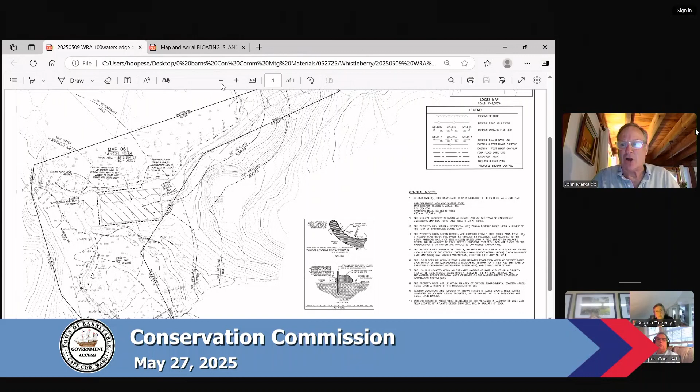So that's about all I have. If there are any questions, please let me know. Thank you, John. Any questions from the commissioner? Seeing none.

It's pretty straightforward on this project. Ed, do you have any comments on this one? No comments. Okay, Channel 18, any public comment on this? Seeing none.

Could I have a motion to approve this project as a negative determination? So moved. Second. Roll call. Abadili, aye. Foster, aye. Hearn, aye. Kashulik, aye. Lee, aye. Sampu, aye. And Tangney, aye. That's unanimous, Mr. Chair.

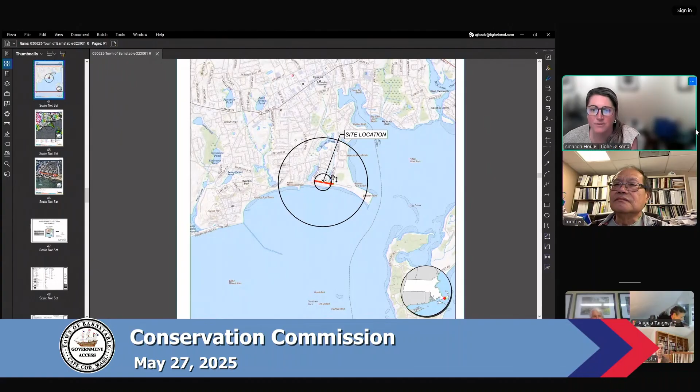The town is proposing to replace an existing failing culvert on Hawes Ave, as well as mill and repave a section of Hawes Ave. We're looking here on Kalmus Beach, situated between SD Ave and Ocean Street. I'll flip over to our ortho photograph here. The limit of work for the culvert replacement is here, in this area perpendicular to the roadway, and this section of Hawes Ave will also be milled and repaved. There's been quite a bit of patching and maintenance work in the roadway because several sections of the culvert are collapsing and failing. It's an old reinforced concrete pipe.

So we evaluated a number of alternatives: lining it, replacing it in its entirety. It outlets near where you see this label that says Kalmus Beach. In looking at the various alternatives, replacing the entirety would impact a greater extent of resource areas. So the project team opted to target the most deficient section, particularly the area underlying the roadway. It's going to be this inlet/outlet within the salt marsh here, and then down until about the midpoint in the culvert, where my mouse is panning.

The work will occur within salt marsh. This embayment up here is regulated as salt marsh within the existing roadway, as well as a section of coastal dune. I'd like to point out at the outset that we've applied for this under limited project status under 310 CMR 10.24 for maintenance and improvement of public roadways, as well as maintenance and repair of structures, including culverts, given the temporary impacts we're looking at in terms of salt marsh.

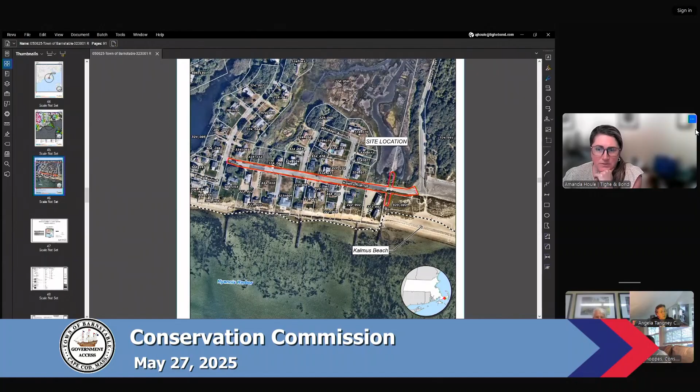We examined our limit of work and have tried to keep the trenching as narrow as possible. Instead of doing a trench with sloping sides, we're proposing a trench box to keep this as tight as possible, so we're minimizing the impact to the dune and to the salt marsh. And then I can pan to go to our plans here. Let me zoom out here.

So this is a better view of this now that you've seen the area. We're situated in coastal dune, with a fringe of salt marsh. We have our outlet here, our limit of work, and then the excavation around the culvert.

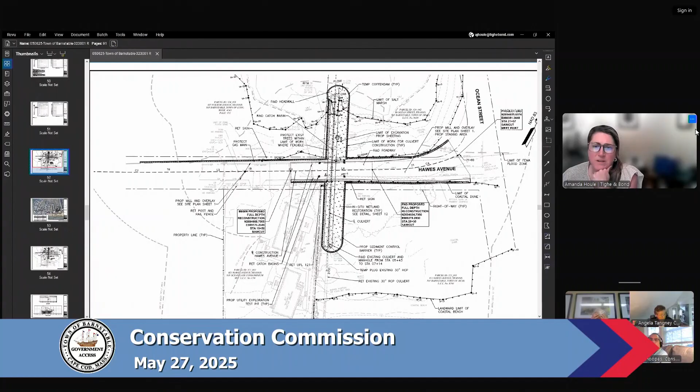We'll be installing timber matting on the outside of the sheet piling used to trench box the excavation, in order to minimize pressure and compaction of both the marsh and the coastal dune. Given the sensitivity of the resources we're working in, we're proposing to segregate and stockpile the dune sediment and soil separately. For the salt marsh that's excavated, we're looking to stockpile and maintain the peat and marsh platform, covering it or keeping it inundated with brackish or saline water over the course of construction, so we can reinstall it following replacement of this culvert section.

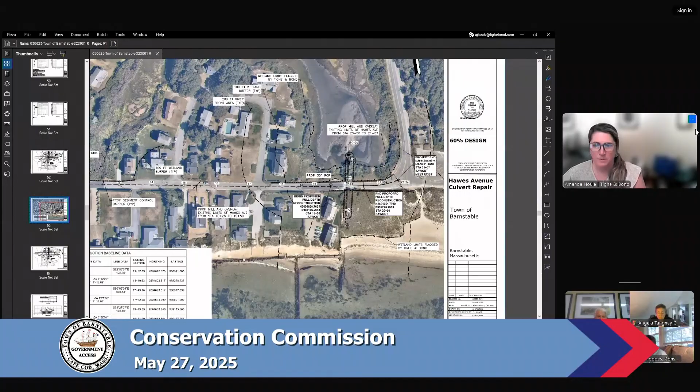Here's another helpful view overlaid on an ortho. Again, we have the outlet, our limit of work, the coastal dune, and the proposed 30-inch RCP that we're going to be replacing.

We have natural heritage habitat here for piping plover and least tern. We've filed a joint MESA review with natural heritage. Their 30-day review ends on June 5th, so we're still awaiting comments, but we anticipate a time of year restriction. Given the location of the work adjacent to Kalmus Beach, the town is looking to complete this in the fall and winter outside of the tourist season, which will dovetail nicely with the off season for the shorebirds as well.

We're also in receipt of some comments from Mass DMF. They commented, agreeing with and commending the marsh restoration and the in situ replacement of the resource areas, and they've asked for a little more detail in terms of the restoration monitoring. So given this is an in situ replacement, we're proposing 2 years, 2 growing seasons, of monitoring by a PWS and certified ecological restoration practitioner to cover and monitor the reestablishment of this marsh platform in this area.

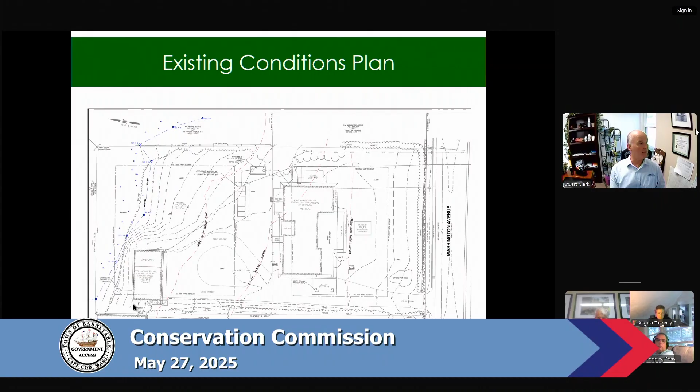So the proposed work, as you guys probably understand, we're going to lift up the house and install a new foundation because its sills are right next to the ground, and it needs some better engineering to keep the house structurally sound.

The carriage house is in the 50-foot buffer zone, but the back corner of the carriage house foundation is cracked and settled, and the owner would like to repair that.

Also, with new building code, we need to have two means of egress, so we want to put a second means of egress here. The existing egress is here, and this will be rebuilt. Then the applicant would like to do some stone path walks around the property. The driveway is a circular driveway now, and it's just going to be cut back to a square driveway.

Let me go down the next slide. Here's the calculation of the hardscape. The green on the top left is the area between the 50 and the 100-foot buffer, and that comes out to 1,567 square feet. The red area is -- I had that wrong.

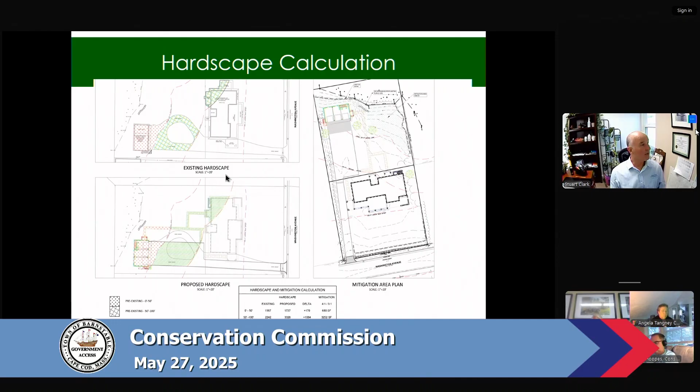The owner did have a landscape designer prepare a landscaping plan for the commission's use, and it shows the number of plantings and where they're going to be. She is using a 3-tiered approach where you transition slowly from grasslands to grass and perennials into a shrub area right at the wetland line.

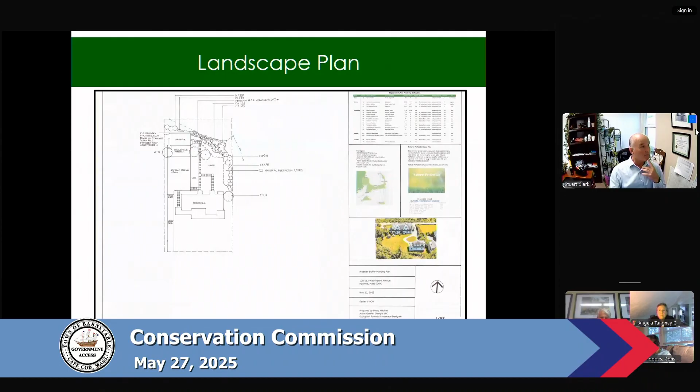I think that's just about it. If the commission has any questions, I have the owner here with me, I have the architect with me, and I believe we have the applicant, Kara, online also.

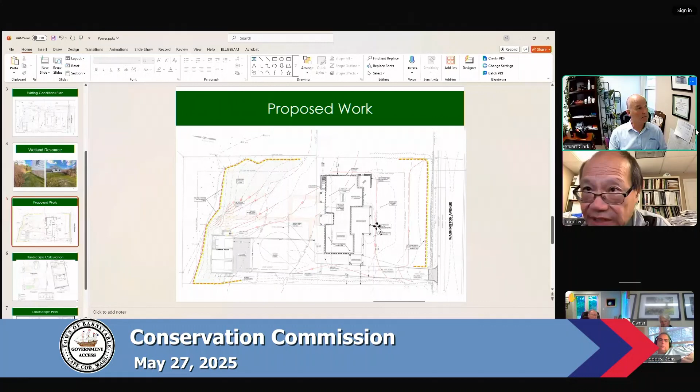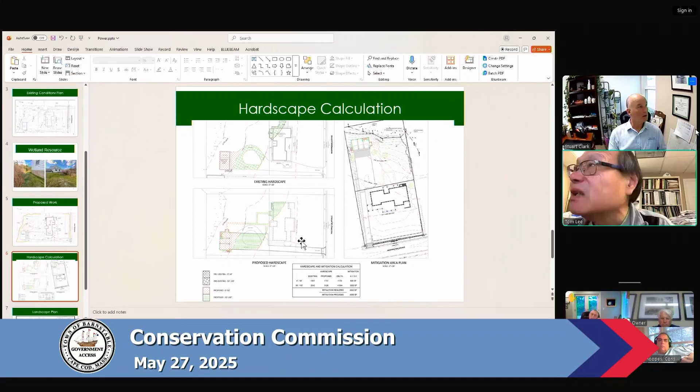Stuart, two questions. Number 1, when you show the mitigation calculations, what's the date on this plan? I don't think I have one. You have it, but it's just not colored as this one is. No, what you have is in black and white. No, the calculations - the one that I have still shows it differently, and you don't have that. So I just want to make sure we have a copy.

What's the date on that plan? That plan should be 5/22. 5/22? Yeah, okay. And we have that in the office? I was just going to say, I ran into the same issue. I was just looking at this plan. I've got a 5/21 plan. This is a new plan that I have not seen before. Okay, that's why I asked the question.

Because in the one that you have, you're showing that 4,000 square feet mitigation provided, but your landscaping plan does not match that area, so you may need some additional revised plans to reflect that. Yeah, I was using my plans as calculation. The landscape designer is in New York, and we're working remotely to get this done. So I told her that we use mine as the mitigation area plan, and then we'd use hers for the planting plan.

Okay, but I just want to make sure. I did have our surveyors go out and stake the line here along the mitigation area, stake the walk, and stake the hay bales along the back.

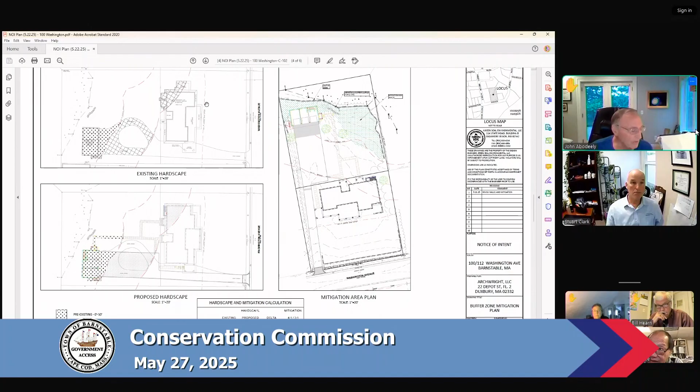Let me jump back in on that, if I might. I respect where the homeowner is coming from, obviously, but a pea stone area, something that's a little bit more pervious than cobblestones - I wonder if that wouldn't be an option that would meet everybody's needs. Because you are within the 50, and obviously there is the historical structure there. But if it's an opportunity to make things a little bit better, I'm kind of wondering if you can't rethink what the alternative is to that.

And the second part of that question was, right now there's grass in that circular area that you're going to pull out and put asphalt in for the parking area. Again, asphalt is not a very good thing from an environmental point of view. So have you considered options to asphalt that would aesthetically, in my opinion, be better, but it's an individual judgment?

Yeah, John, I apologize, but that's not my call, if you know what I mean. This is what the client wants with this property, and this is what I'm presenting to you. Okay, well, that doesn't really address my concerns. I respect where you're coming from as an agent, but it doesn't really address my concerns from the commission's point of view, or at least this commissioner's point of view.

Excuse me, can you hear me? Who's this? This is Carolyn Tenney, the owner of the property. Hello, John. Hi, I'm Carolyn. I don't know if you can see me. Well, we can't see you. Okay, I'm just the asphalt driveway - the way it's designed is so that we can park enough cars in there without being on the main road, because the driveway itself is very narrow.

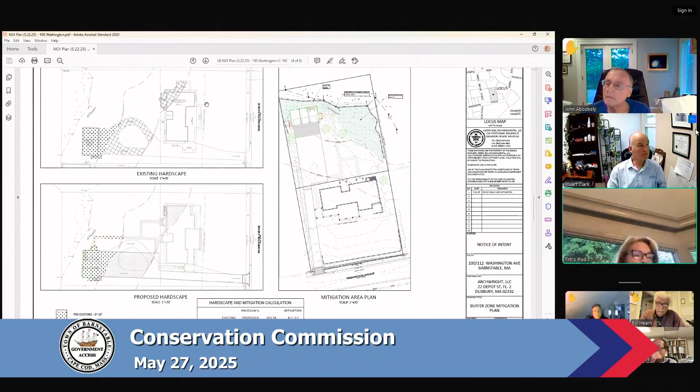I hired an ecological landscaper, so she went to a lot of trouble to make sure we were creating biodiversity. I've been working with her for 7 years on my property in New York. I'm committed to conservation, natives. We even researched grass seed, what would grow best, what the root structures of everything were. We worked really quickly to get this to you guys. The plan has wonderful plants, and there'll be more because we love it.

That's just what we do. I run the conservation department for my garden club, and I'm running a native plant sale. So I'm happy — as far as I am concerned, the back will be all native.

The asphalt court was for my husband because it's easier to... he likes asphalt, but I'm open. I don't like asphalt, so I'm open for suggestions. And I certainly don't think you should compromise and do it your way.

Whatever my wife wanted, we compromised. I definitely don't want to hold up the project over the driveway. So do you have something that you would prefer that isn't too pebbly, that has bigger chunks?

Ed or Peter or Bill, your thoughts on that? You have a stronger ecological background than I do. I don't know if Bill or Peter or Ed would like to answer that question.

Before you answer, the other thing that came to mind looking at the asphalt — that large asphalt area, and looking at the grade, there will be a lot of runoff from the asphalt down to your low point. So how are you going to deal with that? That's another issue I thought of as John was talking. There are multiple options of different paving surfaces that can provide some infiltration and stability, so those are in the market as well, besides asphalt. That's my comment.

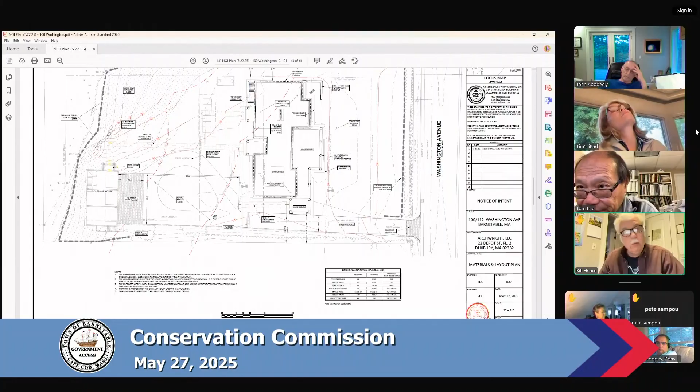I guess I received two different plans, and the last one I received was dated May 22nd, and it had mitigation required of 4,331 square feet. But the mitigation provided was 3,400, with a 931 square foot in-lieu payment. I went under the assumption — in the 4+ years I've been on the commission, we've not accepted an in-lieu fee — and I saw there was plenty of room for additional mitigation plantings within this 0 to 50 foot buffer. I even had something sketched out, but it becomes moot.

Because I show up tonight and it's like, oh no, it's only a 4,000 — essentially a 3,900 square foot requirement, and we're going to provide 4,000. So I'm like, huh?

That was through the chair. That was my mistake — I thought I saw that in the bylaw, and I thought we could do an in-lieu payment just to keep some of the backyard for my client.

She adamantly told me I was wrong, so we pulled back that set of drawings. Also, speaking with your staff, they say they rarely give out those hardships. So that's why I pulled that set of plans back. So my question then becomes, where is the additional mitigation?

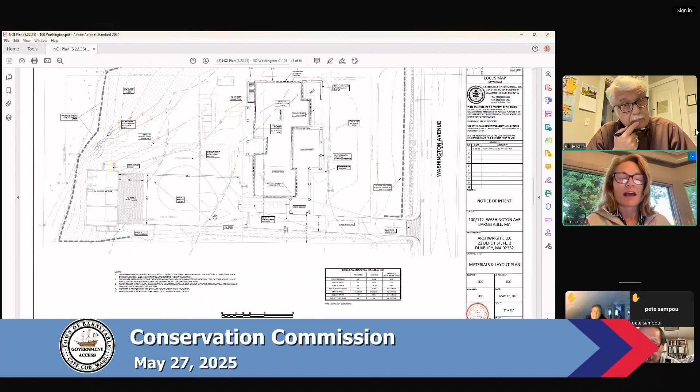But this is a special combination that's supposed to help with- I don't have, Stu, if you can put up Betsy's plan. It talks a little bit about, over there, what the natural perfection seed is and some of the things it's supposed to be doing.

We can put as much of that as you like into the lawn. I mean, at some point, I'm a gardener, so I would like to be able to add some perennials, some native perennials, more of them as we go on. I don't want to have to just do- you know what I mean, I like plants. Good, so I would support that.

Yeah, it's just that we came up with trying to give you the square footage. We want you to understand that you're actually working with people that are completely committed to this type of landscaping, which is different. You're not going to go back there and find- even the trees, we did flowering dogwoods because they're good for the birds.

So you would have mitigation boundary markers. We normally have something like that, don't we, Tom? Yeah, I believe that's what the area- staking, I believe that's what they were staking out today. Literally, you'd have some kind of stone markers that show, no, it's not going to be a lawn towards the wetland. It's going to be plants, a meadow, and sometimes we do have some seeded meadows that we will have mowed like once a year or something like that.

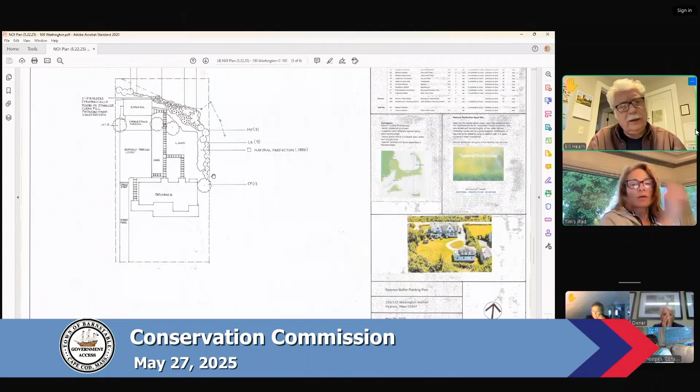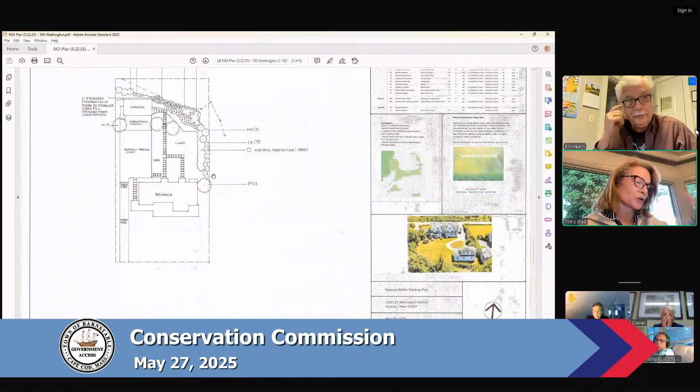There's a huge cedar, there's so much bittersweet. It's obscene. I encourage you to work on the bittersweet, and maybe the Phragmites even might be controlled. There's also Japanese knotweed. So we don't have bittersweet, Phragmites, or Japanese knotweed here, so how to control them is something I'm going to have to learn about. But I obviously need to control them if I want to grow a nice native perennial garden back there.

So we deal with that all the time. People are forever dealing with it. Maybe I'll come speak to you guys and you can give me advice. Are you all set, Bill? I am, yes, thank you.

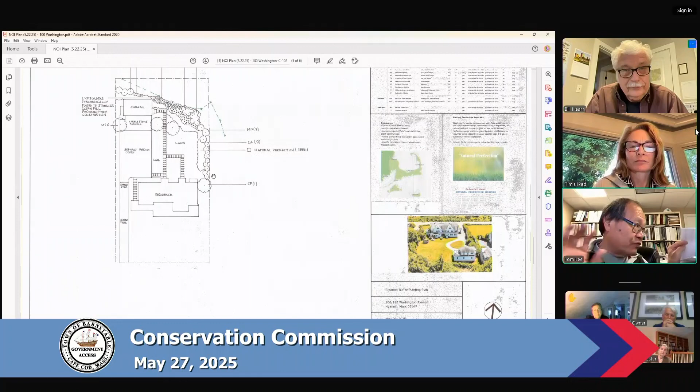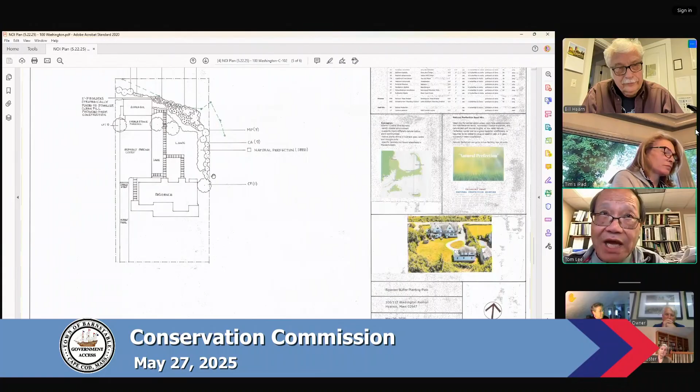Stuart, one thing I want to mention, not just to you, is that when we do the mitigation calculation, we usually break it down in terms of how many square feet the house addition is, how many square feet the driveway is. We break it down in terms of the hardscaping rather than as a total number. Not that we don't trust you, we just want to follow line by line how the calculations are being done. That's all, it's not just you. We always ask the engineer to do that kind of breakdown.

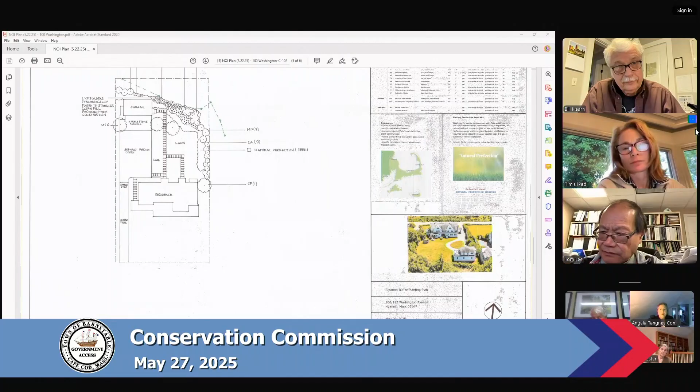So, Angela. Yeah, thank you, Tom. I've been out there twice, and the last time was at 9:30 this morning, so I was glad to hear that it actually has been marked, because there were no markings when I went today to even show where the 50-foot buffer is or the mitigation line. So I'm glad to hear that's been done.

On the plan, when you leave the carriage house, because I was trying to limit the amount of hardscape in the 0 to 50, if you go out that egress and take a sharp right and go towards the house, you wouldn't have to go so far out into the 50. Is there a reason your walk goes down a hill and then back up to the house? If you took a sharp right out of the carriage house, you'd be aiming right back towards that second dormer at the house, running along the driveway rather than putting more hardscape in the area that's sloped into the resource area. Do you understand what I'm saying? I understand exactly what you're saying. That might help reduce some of the square footage of hardscape you're trying to mitigate for. That was my only suggestion, but again, I'm doing this without anything marked today. So I walked it this morning to try to figure out how to do less in the 50. Thank you.

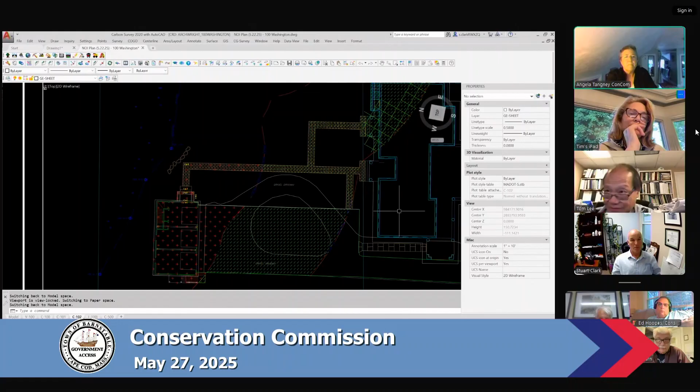Thank you, Angela. Any other questions from the commissioners? Tom, let me just say I was at the house at about 3 o'clock this afternoon, as usual the last one there, and it was marked, Angela and Bill.

That's all right, I'm glad you went. Good. I can't resist saying it should have been marked a week ago, so anybody who didn't come at the same time John came had to spend a lot of time trying to figure out what they were looking at. That's a problem, so just learn from that, I guess, if you have another application before us.

Tom, Peter has his hand out. Yep, I'm just thinking about that, because we've talked about it before, that if the flagging is not available, we could consider that as not enough information. But I just want to mention this isn't just the first time, this has happened multiple times already in a couple other applications as well.

So, Pete. I would agree, and I'm glad to hear the owner take a lead on having a semi-permeable parking area, whether that's crushed shell or pavers. I completely agree with my fellow commissioners that asphalt with that hill slope there is not a good option, so I'm glad the applicant is receptive to that suggestion. I'm glad to see all the improvements that have happened here. Thank you.

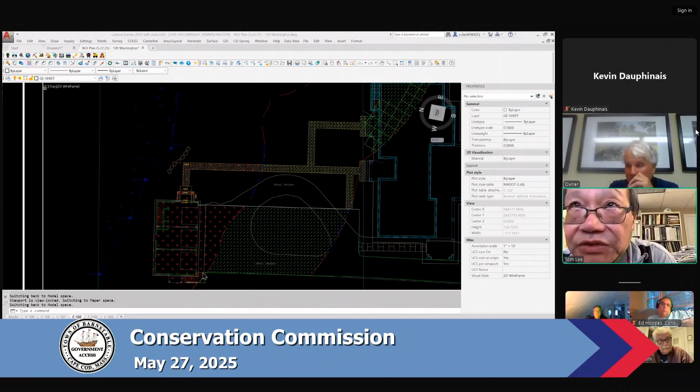Stuart, I have a couple questions for you, may not be related to the conversations. On the carriage house, you mentioned on the drawing that there's 2 bedrooms up there. Are you keeping 2 bedrooms up there after it's built?

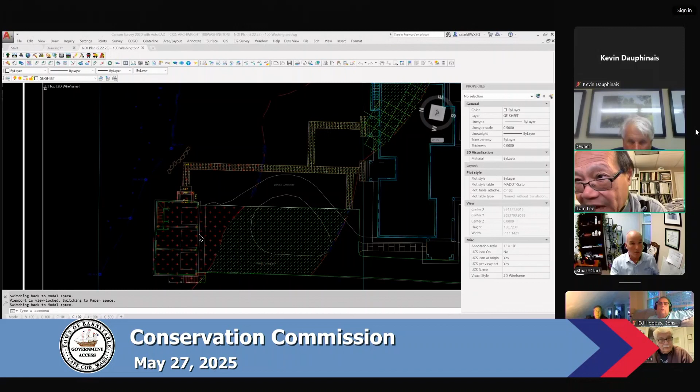No, they're already there. On the back of the drawing you're showing a cesspool, and on the next page you said abandoned. So how is it? Where does the sewage go for the bedroom? Is there a bathroom in there or no? Yes, there's a bathroom in there.

There's one entrance on the east side, one on the west side. Then there's a 3-car garage underneath. The bedrooms are upstairs. But my question is, where does the sewage go if there is that bathroom?

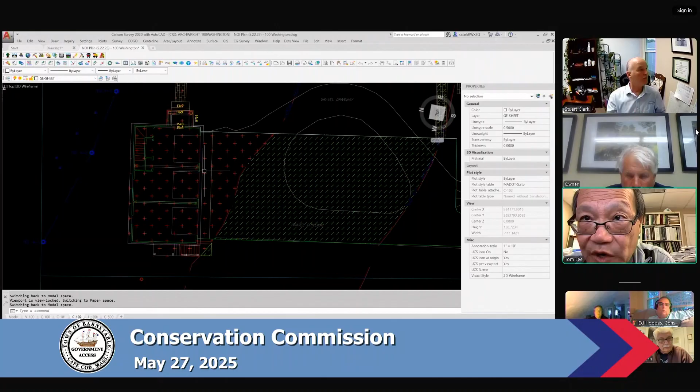Okay, I didn't understand your question. The sewage for that right now is a cesspool right at the wetland line. We're taking that out and abandoning it, and we're going to tie into the septic system up here. No, sorry, we're going to have to put in a new septic system.

That's why I asked the question, because I see abandoned, and then there's 2 bedrooms. I'm changing my hats from Board of Health and looking at this as septic stuff, so that's my question. So the septic, it's dealt with. Well, it will probably be where the driveway is. I don't know, we have to talk to the Board of Health about where they want it.

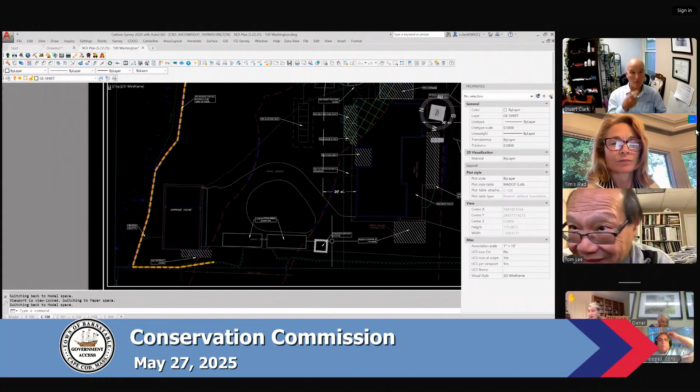Luis: Doesn't that have to come before us or be included in this plan? It should be on this plan. Right, layout stuff, because otherwise how are you going to see all this as-built drawing and stuff like that? So if it's within our jurisdiction, it may not be. I don't know. Well, it is in the jurisdiction. Yeah, if it's for the carriage house, I suspect it would have to be. Right, sorry, okay.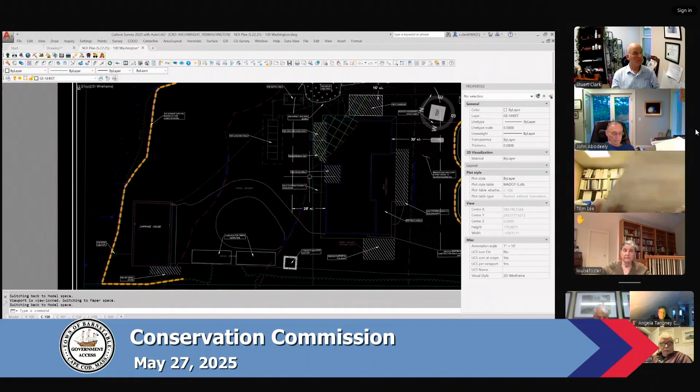Any other questions from the commissioners? Any public comment on this one? Seeing none. Stuart and the homeowner, I think you are looking for a revised plan with a continuance date.

And then we're waiting for the DEP number as well. So I have 2 dates: one is June 3rd and the other is June 10th. Which one would suit you best? June 3rd.

Okay, could I have a motion to continue this application to June 3rd? Excuse me, Tom, just a question before. Louise, are we continuing this wide open, or just for DEP numbers, or what? Just clarify that for me, if you would, please.

I am continuing this with the whole thing open because we have not seen the changes to the parking surface area, what materials will be used, and whether they have enough time to put the septic in front of the carriage house, and what the changes are, and then we want to see that breakdown in terms of the mitigation calculations. Excuse me, I'm sorry to interrupt, but I think we aren't applying to do the carriage house now.

We're showing you the carriage house so that you understand what the problems are, but we're just trying to get the main house done. We're just not prepared to do the carriage house at the moment. We're showing you the whole property so you could understand it, because the wetlands and everything were in the carriage house area.

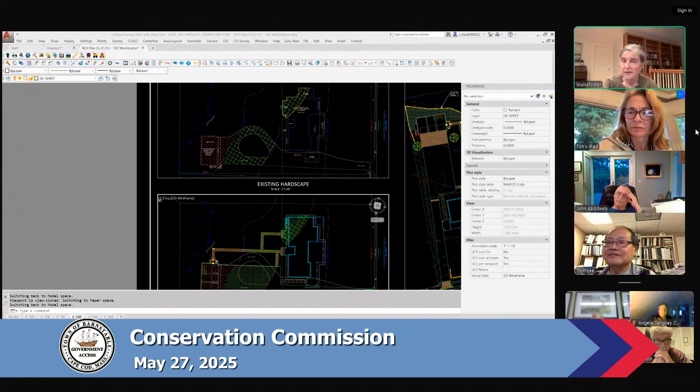Thank you. Should be some limitation then on what else happens to that structure, right? Well, yeah, we won't be able to get an occupancy permit until we have septic. Yeah, no one's going to be in there until there's septic. There's nothing, you can't use that house right now.

So the other thing that you need to take a look at is that Angela was talking about that stone walkway right next to your driveway, to minimize the intrusion. That's difficult for me, I mean, that's the design. The design is purposeful because I want people to be able to be in the plantings, I want to experience them. To narrow it, I don't know if we have to do that, it's compromising sort of the vision, but I guess.

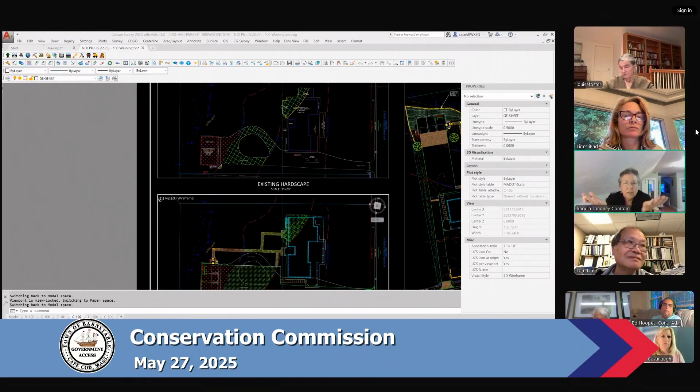Can I ask a question while you're speaking of this? You have 2 trees on both sides of your walkway that when you leave the carriage house, and you talked about leveling the ground there. So are you filling in where it dips off there? That's what I don't understand. Yeah, no, not completely. We're going to put some big boulders in there, and those will be bushes.

The trees won't be in there, they'll be in front of that. You're doing that all in the 50 though, as you walk out from the carriage house, and that was my concern. I was trying to limit the hardscape and the changes you were making. That was something we were worried about too.

We didn't want to do that. That's why we just thought we'd do some big rocks, and put some plants and grasses and shrubs in there, so it won't be flat. It'll just be less, because right now it's a hill. You have to walk down to get to the house, right? Exactly. But when you put in some of those plants, they grow 6 feet, so it should be okay.

It doesn't need to be leveled out. I'm not looking to make this into a yard that people play in. I understand, and I'm trying to work with you. So this could be an amended plan, a revision that comes later. Is that what we're trying to say as a commission, Ed? Thank you, I appreciate your help. So Angela's right, that could come in as an amendment later. Angela, you're absolutely right, in my opinion.

So is June 3rd still your choice? Yes. Okay, but I just want to understand, Angela — I didn't get your last name, Angela, sorry to call you by just your first name. But what else can I get you in terms of information so that you're clear?

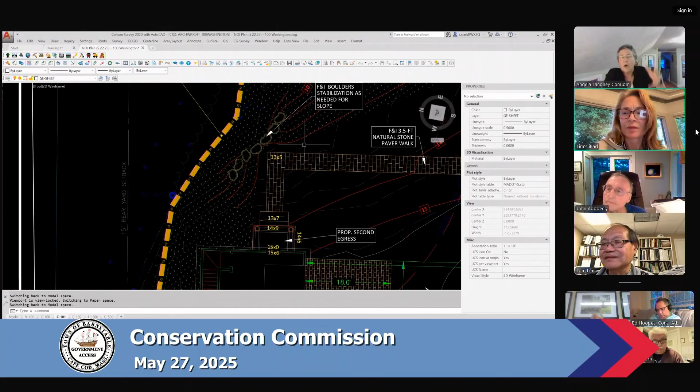Okay, for June 3rd. And then again, all these details of your planning sounds like we could amend it later. Okay, yep, thank you, okay.

Thank you. Could I have a motion to continue this application to June 3rd?

So moved. Second. Roll call. Abodeely, aye. Foster. Hearn, aye. Kashulik, aye. Lee, aye. Sampu, aye. And Tagney, aye. So that's unanimous, Mr. Chair.

Thank you. Good luck. Thank you, guys.

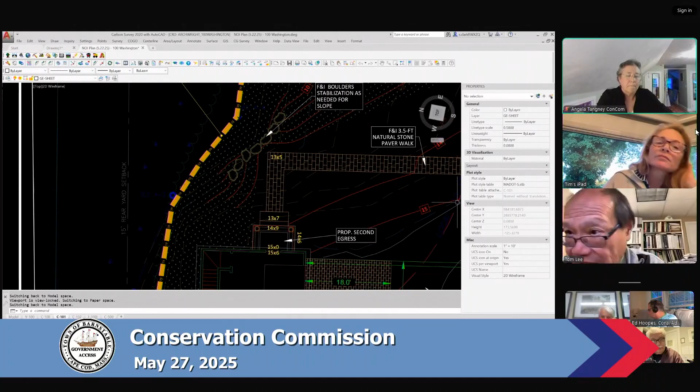The last NOI is on the Barnstable Planning and Development test pilot project to deploy 80 square feet of floating treatment wetlands for the purpose of monitoring eutrophication and removing nitrogen and phosphorus to reduce cyanobacteria in Eagle Pond at 0 Putnam Avenue, Cotuit, as shown on Assessors Map 055, parcel 001.

Is Jim with us? I am, Mr. Chairman. Hi Jim, how are you doing today? Good, good, excellent. So thank you for having me tonight. For everyone who doesn't know me, my name is Jim Kupfer. I'm the Director of Planning and Development for the town of Barnstable.

And I have the pleasure tonight to introduce a great partnership that we're hoping to have and continue into the future, potentially, with the town, Barnstable Land Trust, and St. John Paul II High School's AP Environmental Science team. So I'm here to present a request to place a small floating island temporarily in Eagle Pond in Cotuit. This is an opportunity to develop a program that gives younger generations real-world opportunities to explore our environment and work on projects we as a town do elsewhere, similar to what Amber Unruh has done elsewhere. Amber has been extremely helpful in this process — she speaks the language, I really don't.

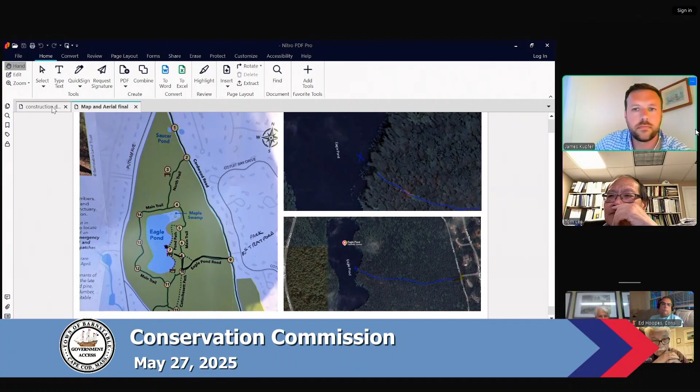Does it switch over to the construction detail now? Yeah. Okay, excellent. So the construction detail — very simple — all volunteer material, all volunteer work here by Ms. Gilliland and her team.

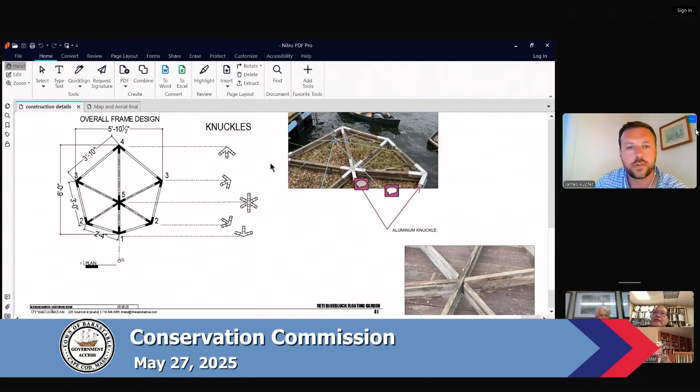And this will be, again, placed about 5 feet off the edge and monitored throughout the summer and into the fall by the team of students, as well as teacher and other volunteers, including myself. So with that, happy to answer any questions.

Thank you. Question from the commissioner. Anyone? Yeah, Tom, I'm sorry, I couldn't raise my hand. Didn't we get an email from — I can't say his last name — Palma?

Ms. Palma, we got an email expressing her concerns. I don't have a strong enough science background, so I defer to my experts, Peter Sampu and maybe Bill, on the issues raised in that email. Or do you want her to address them first, Bill and Pete? I could sure use your wisdom on the issues she raised.

I think Jim addressed it quickly. Jim, can you just confirm — you're not doing just the grass, correct? That's correct. I don't want to speak for the public, but great questions were raised.

And yes, I can share my screen again. I actually have the updated list, and I could show you the more freshwater vegetation. Just let me share my screen momentarily.

I didn't mean to interrupt, John, but I think he made the change since the abutter letter, I think, is what I was trying to say. That's helpful, Angela. Thank you.

Yes, absolutely, that's correct — a great identifier of the Spartina grass was not a recommended grass. So we went back to the team. We talked to Mr. Hoopes, as well as Amber over at DPW, and our team, and we identified several grasses that are more suitable for this project, more natural for freshwater. Thank you. Pete?